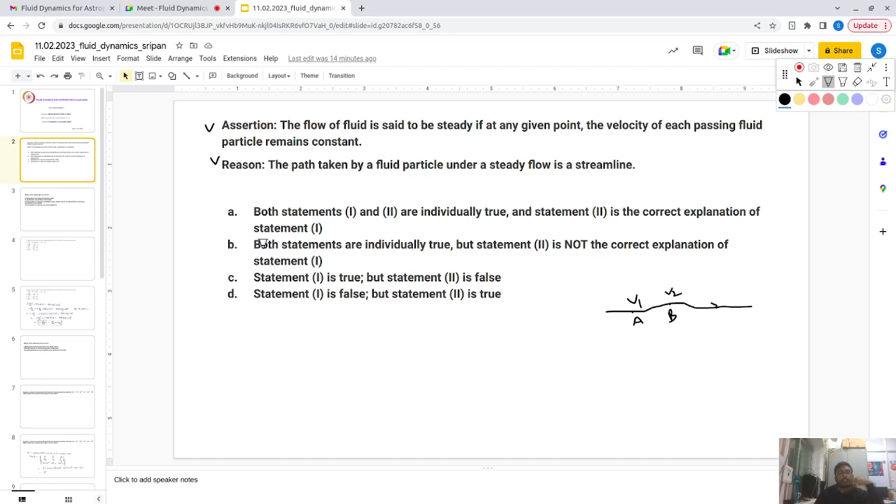So both the assertion and the reason are individually correct, but whether the second one is the reason for this assertion, that is not correct, right? Because this is most likely the phenomena, and this is just a terminology related to that part. So this is not a reason, right?

Both statements are individually true, but statement 2 is not the correct explanation of statement 1. We have this property of a steady flow, and we also call that type of trajectory followed by the fluid particles a streamline. But this streamline terminology is not the reason of this assertion. I think you guys got it, so option B is correct for this answer.

One question, sir - a flow is steady in the sense that if you have the velocity field given to you, and you differentiate it partially with respect to time and that derivative is zero, then the flow is steady, is that true? Yeah. And if there is a time dependence, then the flow is definitely unsteady, is that also true? Yeah, it should not be steady flow at all. Okay, fine, thanks.

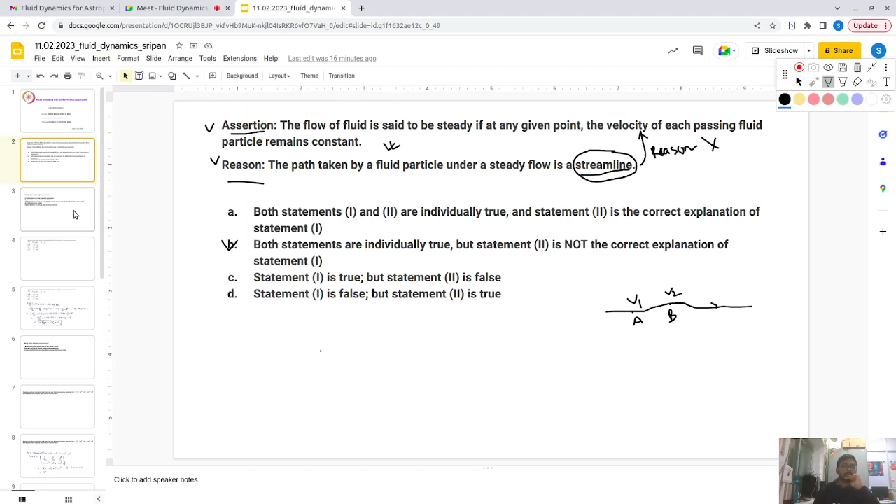So the next question is: which of the following are correct? Streamlines can intersect with each other. Streamlines are parallel to each other. Fluctuations in density is negligible when length scale of considered flow is less than gravitational scale height. Fluctuations in density cannot be neglected.

Can anyone help me answer this question? According to you, which of the following are correct? I think it's 1 and 4 that is correct. So okay, I think it's 1 and 3. So you guys are saying that streamlines can intersect with each other? Yes. Okay.

So in steady flow, what happens is at each point there is a particular velocity, right? And that velocity does not change with time, so it has a constant direction as well as magnitude. Now let's say these are two streamlines. You guys are saying that I have this streamline, I have that streamline, and they are intersecting with each other.

So one is not okay, second and third is correct. Let's say there is a point where streamlines are intersecting. Now what is the direction of velocity along the streamline? It is the tangent at each point, so if it is this, the velocity will be like this. At this intersection point, there will be two tangents, one here and one there. So at some point there would be two directions of velocity, and that is not possible for a streamlined flow.

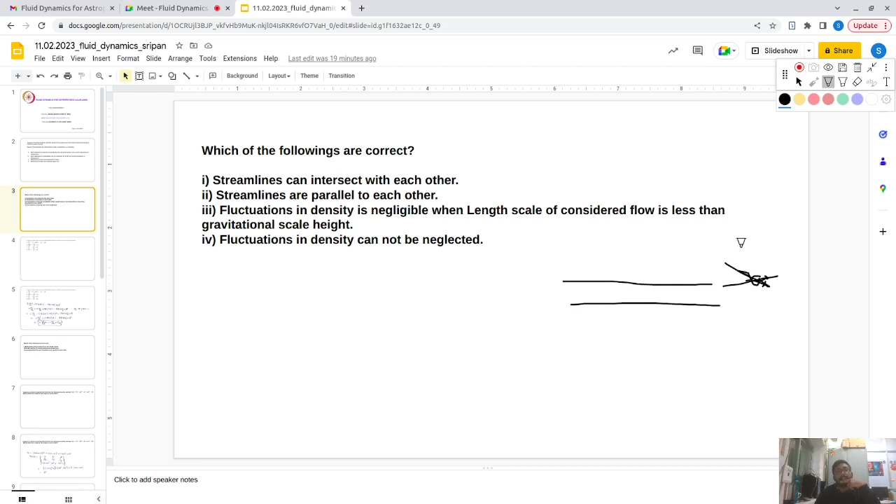It is possible if it is turbulent, but streamlines are connected to steady flows, and you cannot see that kind of turbulence in a steady flow. It goes like a steady streamline, so you cannot have two different directions of velocity at a particular location. So streamlines cannot intersect with each other. What else option do we have? Streamlines are parallel to each other. Obviously, if they are not intersecting at any point, then they should be parallel to each other. So this should be the correct answer.

Now we are left with 3 and 4. Fluctuations in density cannot be neglected. At first you might think okay, it might be correct, but by fluctuation I am saying spatial fluctuation, not temporal fluctuation, because if you have the compressible or incompressible criteria, then del rho del t is 0. I am not talking about that. I am talking about whether the density within the flow is homogeneous or non-homogeneous.

That is the point. Now do you know about the Boussinesq condition or approximation? It tells that the rho g terms are never neglected in any flow — that is the essence of Boussinesq approximation. But it also has another consequence: if the gravitational scale height is higher than the length scale of the considered flow, then you can neglect that fluctuation also.

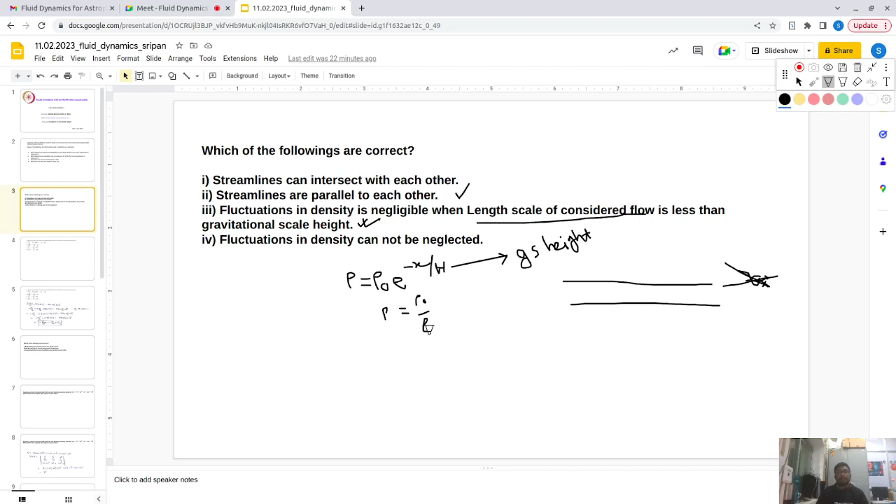Now if the length scale of the considered flow is less than this, then you can think that the fluctuation in density is negligible. But if you have a length scale x which is greater than h, what does it mean? It is already changed by 1 by e times, and if you go further, it will change much more than rho naught by e. So your density cannot be constant throughout the volume if you have a length scale greater than the gravitational scale height.

But if x is less than h, that means you have a very small length scale, then you can say we cannot measure the fluctuation in density. So I think this is also part of Boussinesq's condition. What you said about rho g is obviously correct, but you have two things here. First is the grad p term, the change in pressure gradient. This has to be zero if you are considering a steady flow, for example. From there you can find a similar equation for pressure, that after some height or length scale, pressure will fall down, but till then you cannot neglect the fluctuation in density itself or pressure itself. So I think it's clear.

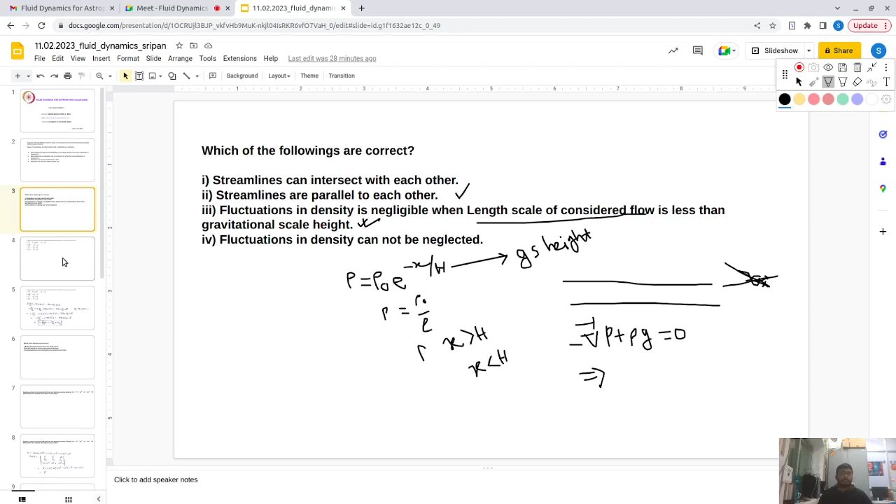So whenever you can define a proper function as a velocity field, then I think we should be able to do this. Okay, I will think about it. Thanks. Fine, so for the time being, let's move on to the next question.

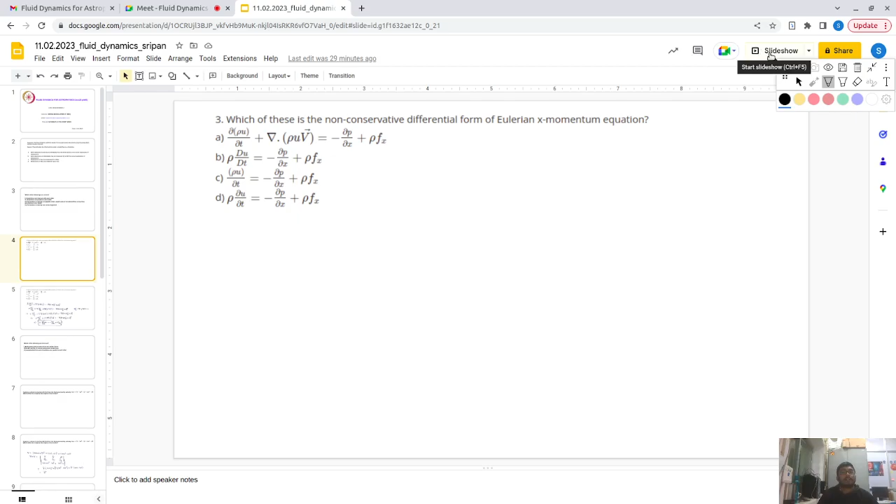What does it mean by x-momentum? It's the x component of the momentum. So first of all, we need to remember what is the Euler equation, what is the form of it. And another thing is what is non-conservative or what is conservative form. So can anyone tell me what is conservative, what is non-conservative form?

The conservative form is you take the quantity, take a time derivative, and you sum that up with the gradient of the flux, and that should equate to zero. That is the general form of a conservative equation.

So basically, when we have the mass continuity equation, what we have is del rho del t plus divergence of rho v, where rho v is the mass flux. So this is a conservative form. Now similarly, for the momentum equation, you can have del t of rho v, the change in the momentum density, plus gradient of the flux will be of the momentum.

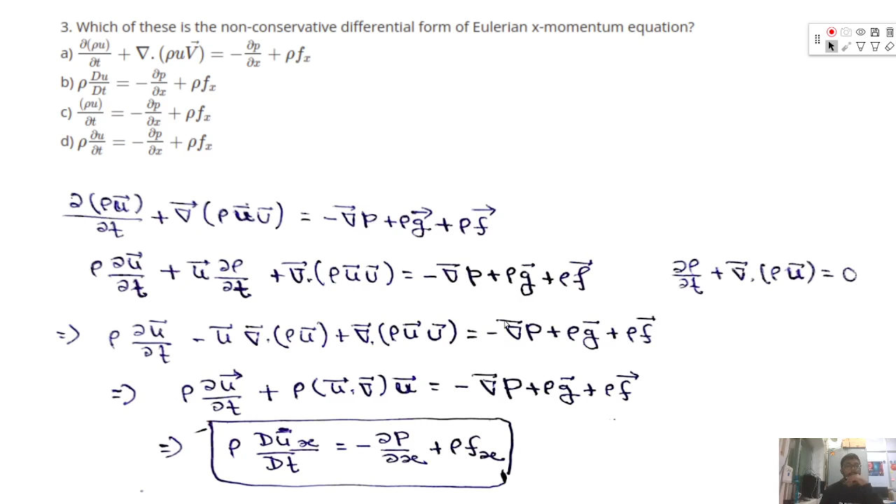So let's move on to the next question. This is a similar thing, the calculation has been done here. Now the next question is: which of the following are incorrect? The first option is both gravity and pressure force are surface forces. Stream function is conserved around streamlines, and equipotential lines and streamlines are parallel to each other.

So tell me what are the incorrect options. 1 and 3 are incorrect. What is incorrect about one? Gravity force is not a surface force; it's a bulk force. And for three, they should be perpendicular, not parallel.

So can you tell me what is a stream function? What about the equipotential line, and how can you tell that they are perpendicular to each other? There was this equation: del phi dot del, the gradient of phi dotted with the gradient of the stream function, equal to 0.

So you have two equations, right? Let's say we start with an incompressible solution, where divergence of u is 0. This happens only if the velocity is defined as the curl of some function, let's say psi, times some unit vector j. This psi is known as the stream function.

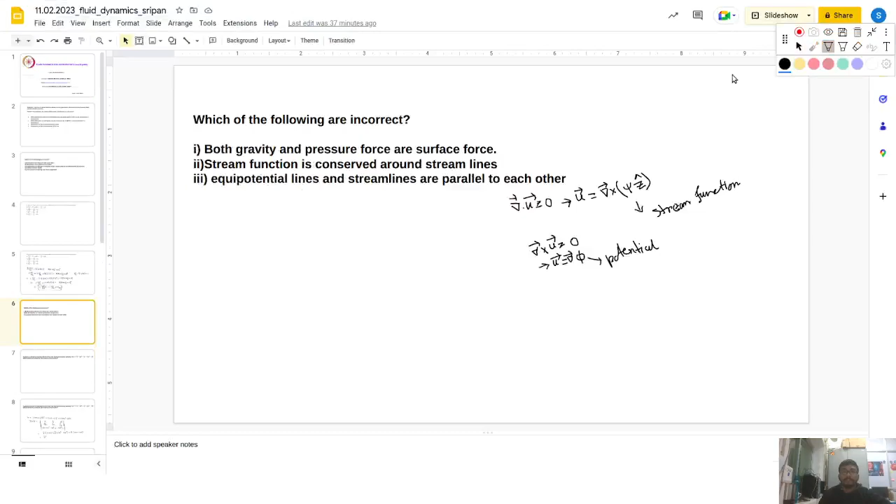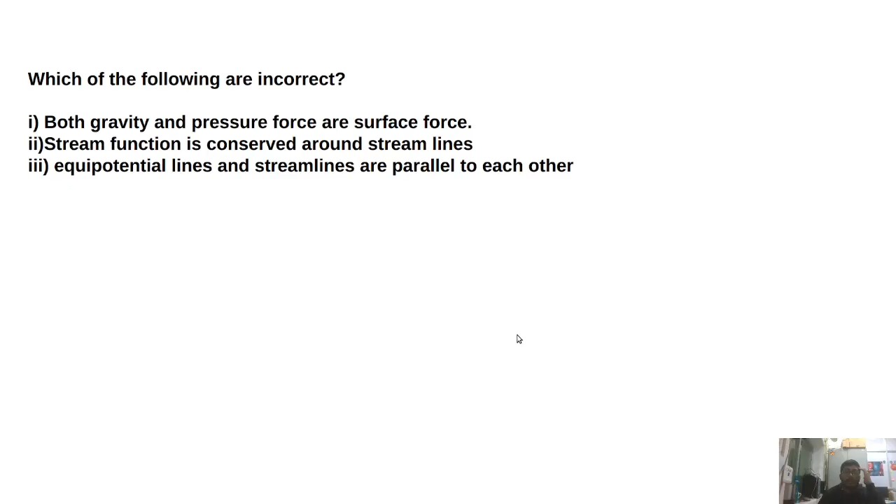So this is the potential. Now you see you have a potential from where you are deriving the velocity. So the grad phi will have a direction which will be in the same direction as u, right? Grad phi is parallel to u.

And from this you find that grad of psi z—now psi is directing in some direction followed by some z, it might be some arbitrary direction, but when you take a curl of that, that means psi z itself is perpendicular to u. Now from these two equations we can see that there are some equipotential lines given by phi, and some stream function along the streamlines. Both will have a perpendicular relation between them, okay?

And the other thing is the stream function is conserved around the streamline, that is also correct, but this should not be a correct answer as gravity is a body force, okay? Fine.

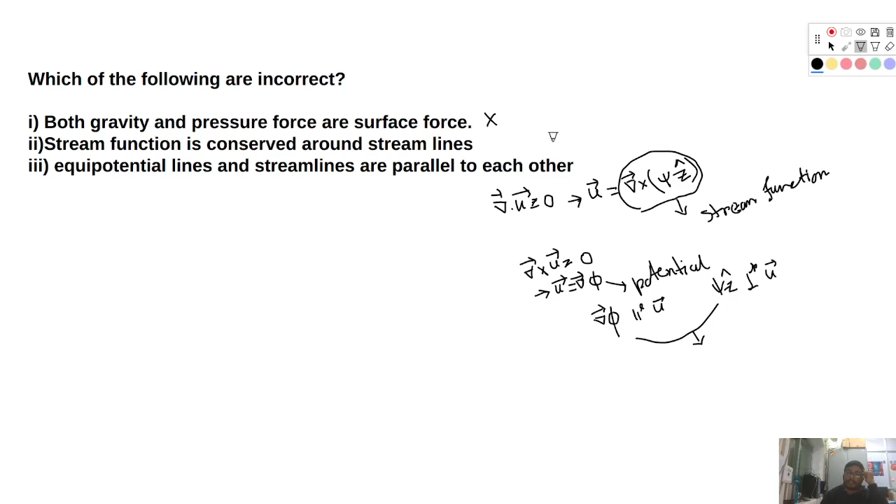Someone is writing something in the chat box. Okay, Sachin, fine.

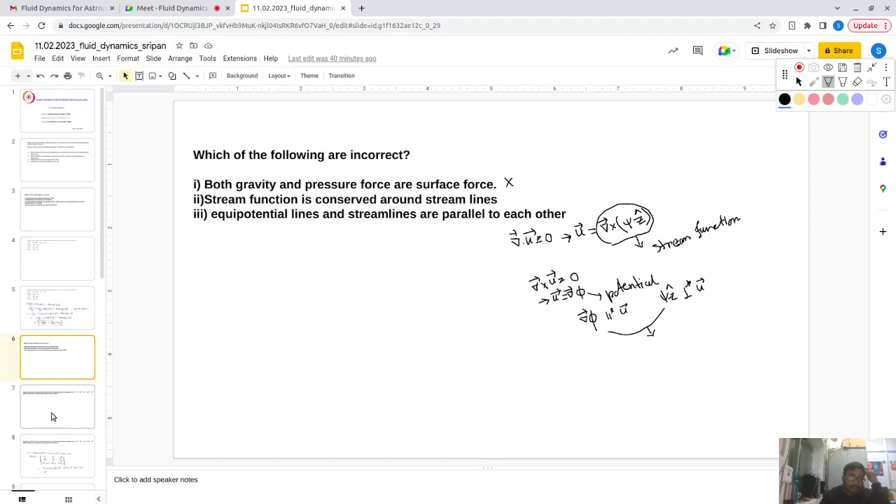Now let's move on to the next question. Suppose a wheel is moving with the flow of a fluid governed by some given velocity field. What will be the complete description of its motion? So you have some flow, some velocity field, and a wheel moving with that flow. Is this motion only translational, or can there be any extra kind of motion associated with this wheel?

So what extra motions can be there? First of all, we need to find out what other options there can be for this wheel besides translational motion. Can anyone tell? Rotation will be one possibility.

Rotation depends upon which property of the fluid? It will depend on the viscosity of the fluid. Now, viscosity depends on the velocity gradient, right? Yes. And another thing is, if it is inviscid, it has to be irrotational also, right?

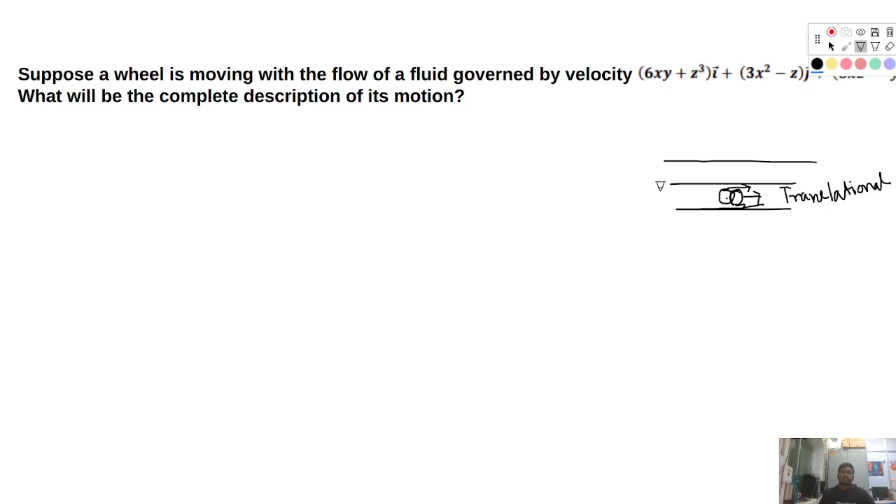Now given a velocity field, what is our point? How can we determine whether there is some rotation or not? Because we don't have any information about viscosity given in the question, we only have a velocity field. So how should we determine whether there is rotation associated with this motion or not?

Can anyone tell me? We need to find the curl of the velocity field. So can you guys solve it yourselves and tell me whether there will be any rotation or not? What you basically have to do is take u as a function of x, y and z, and from there find the curl of u. If it equals zero, then it will be only translation.

And if it is not equal to zero, then you have translation plus some rotation. So kindly solve it yourselves and tell me the complete description. Okay, I found curl is 0, so it should be no rotation, right? Only the translation. Yes, yes.

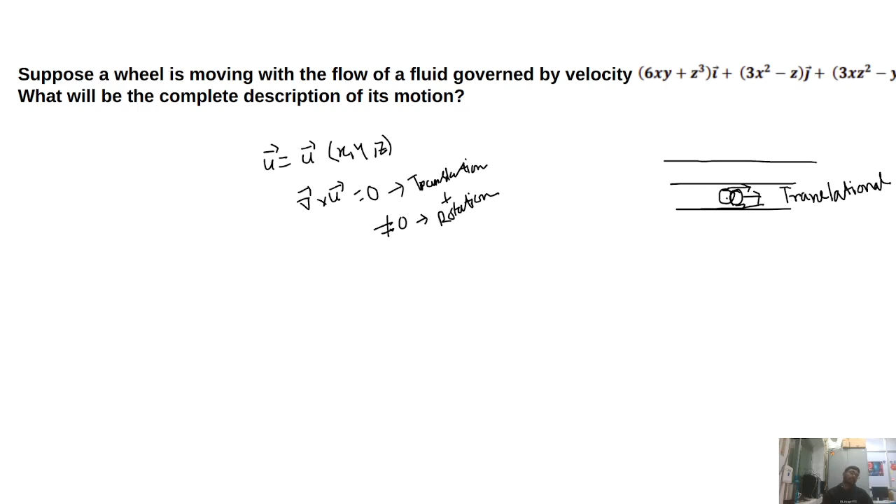Another thing, as I already mentioned, is that if you have irrotational flow, that means there is no velocity gradient also, right? And that means the fluid is not viscous, it is an inviscid fluid. Okay, let's move on to the next question. This is just the solution.

Now, the Navier-Stokes equation describes the motion of: solid substance, non-viscous fluid, viscous fluid, or gas. What is the correct option here? Viscous fluid. Okay, now what is the difference between the Navier-Stokes equation and the Euler equation?

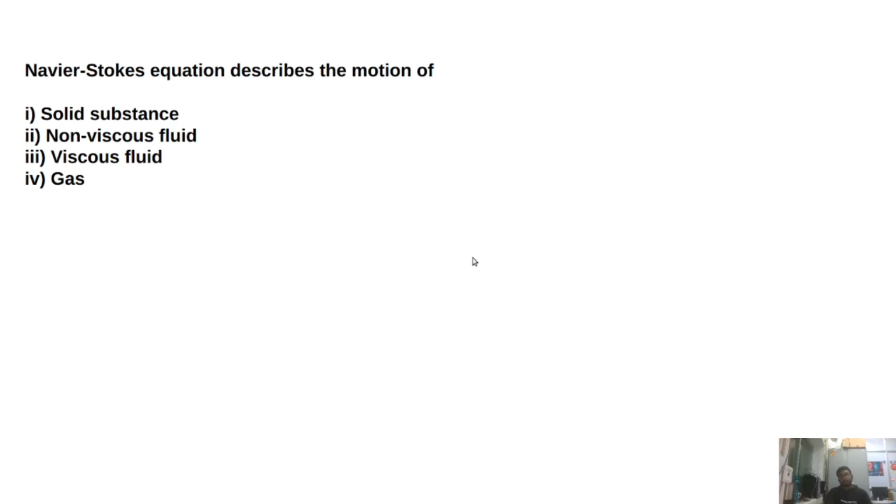We do not consider viscosity when we derive the Euler equation. The Navier-Stokes equation is a more general form, and if you neglect or do not consider the viscous term or drag, then that becomes the Euler equation, right? Okay, so fine, this should be the viscous fluid.

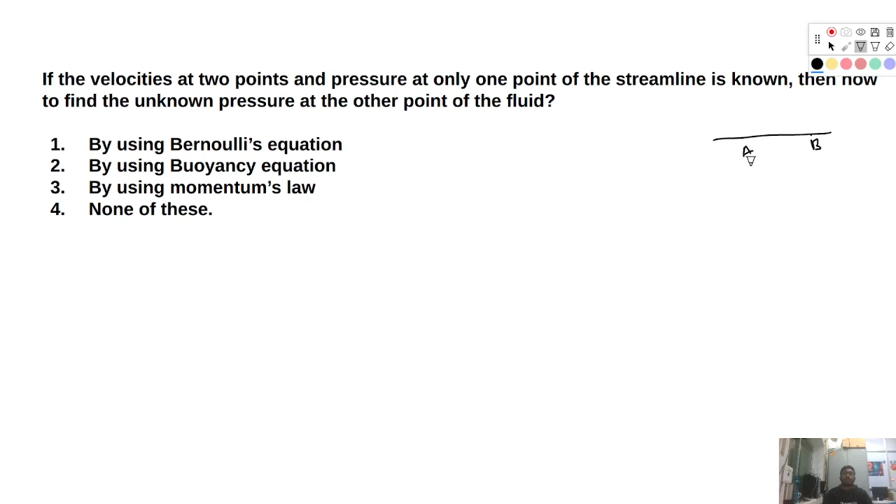Now the next question: if the velocity is known at 2 points, and pressure is known at only one point of the streamline, so you have a streamline with 2 points, let's say A and B. If you know velocity VA and velocity VB, and you only know the pressure at PA, then how do you find the unknown pressure at the other point, PB? Tell me what is the correct option for this.

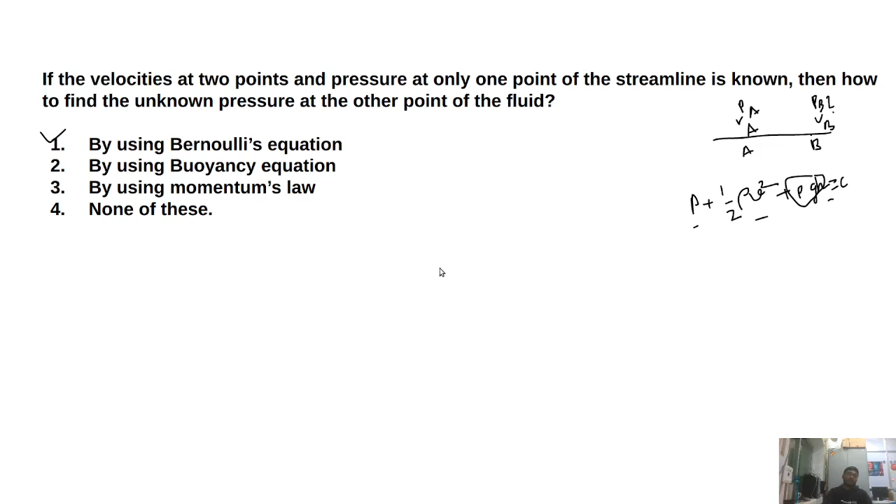The next question is about how Bernoulli's equation is derived, based on the following assumptions: there is no loss of energy in a liquid flow and flow is steady; the flow is rotational; except for gravity and pressure forces; no external force acts on liquid flow; the flow is viscous and incompressible.

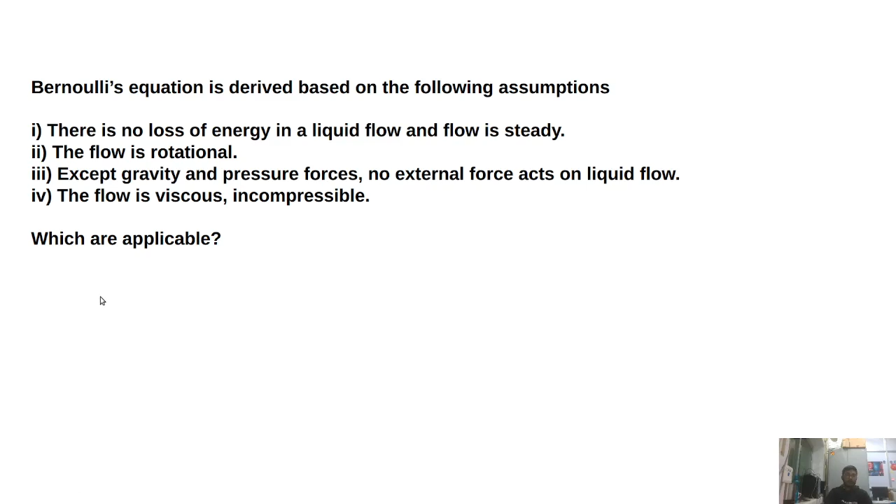So which of these assumptions are applicable? Tell me. A student says: I think there is no loss of energy in the liquid flow, the flow is steady, and except for gravity and pressure force, no external force acts on the liquid flow. What about the other students, is this correct? Another student says first and third. Sachin agrees. Yes, that's correct - the first one and the third one.

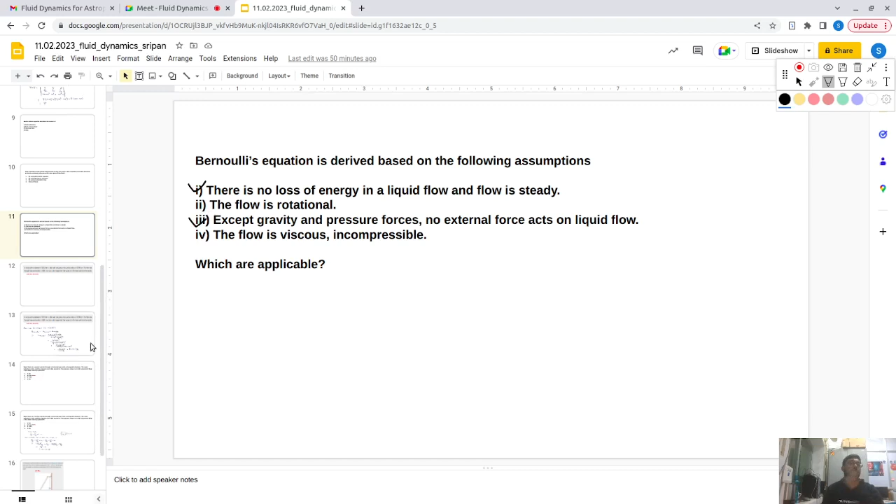Now the next question is a numerical problem you have to calculate. Just give it a try. You have a nozzle with a diameter of 0.5 centimeter, which is attached to a garden hose with a radius of 0.9 centimeter. You have a diameter and a radius, and you have to find the flow rate through the hose and nozzle, which is 0.5 liter per second, given that the flow rate is constant throughout the flow. Calculate the speed of the water in the hose as well as in the nozzle.

Now, without calculating the answer, if we just ask what will be the difference between the speed of the water in the hose and the nozzle - whether the speed of the water is high in the hose and low in the nozzle, or vice versa - how can we tell that? Can anyone tell me? You have a constant flow rate, and two different radii given. How do you find the speed of the water given that the flow rate is constant in different diameters?

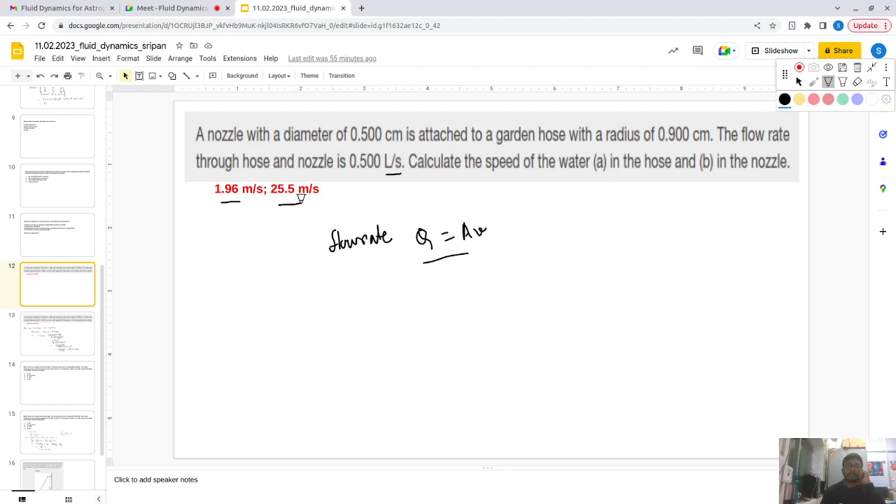Now as someone suggested, if A is higher, V should be lower because the flow rate is constant. Using this formula, you can easily calculate the velocity at two different points, in the hose and the nozzle. The catch is you have to find the cross-sectional area. Since both the nozzle and the hose are cylindrical in shape, you can find the cross-sectional area as pi r square, where r is the radius. Now can you calculate this by yourself and tell me whether these answers are correct?

Is someone trying there? Just give some assurance that you guys are trying.

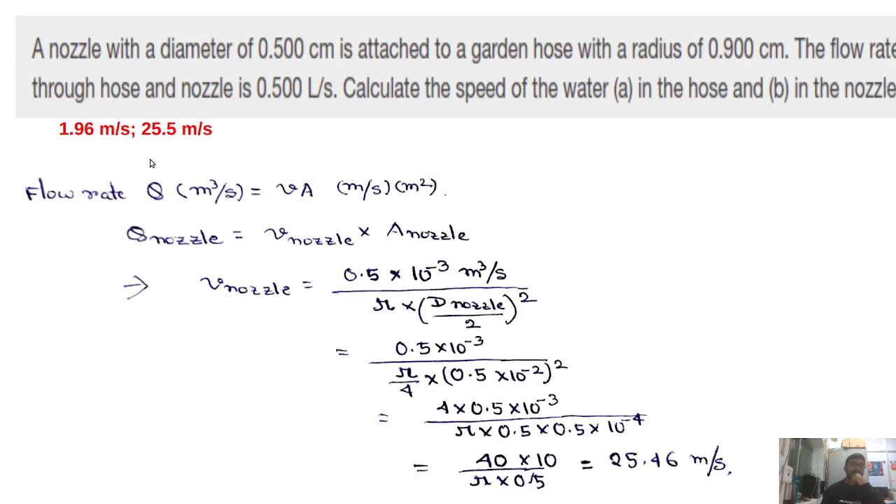I think it's clear, this is a pretty straightforward problem. Any problem? Hello. None from my side, sir. Okay fine, let's move on to the next question.

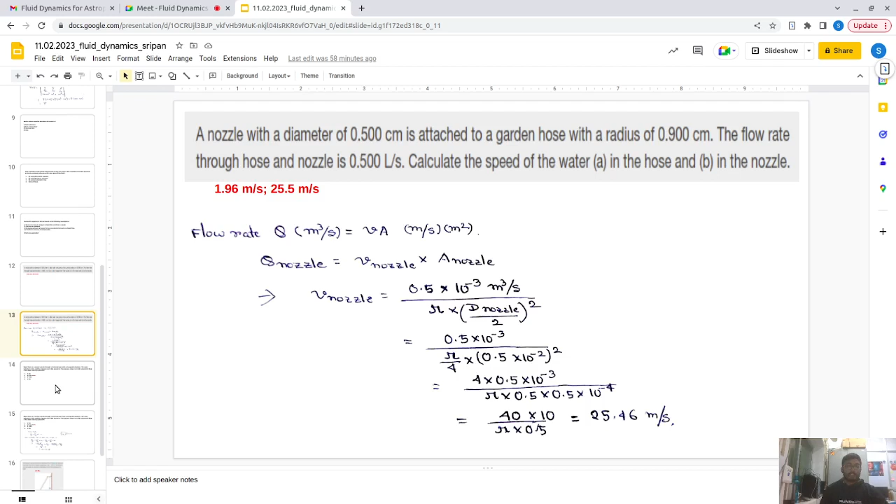So are you guys trying? Yeah, just one minute. Okay, have a try. Writing something. Okay fine, we try.

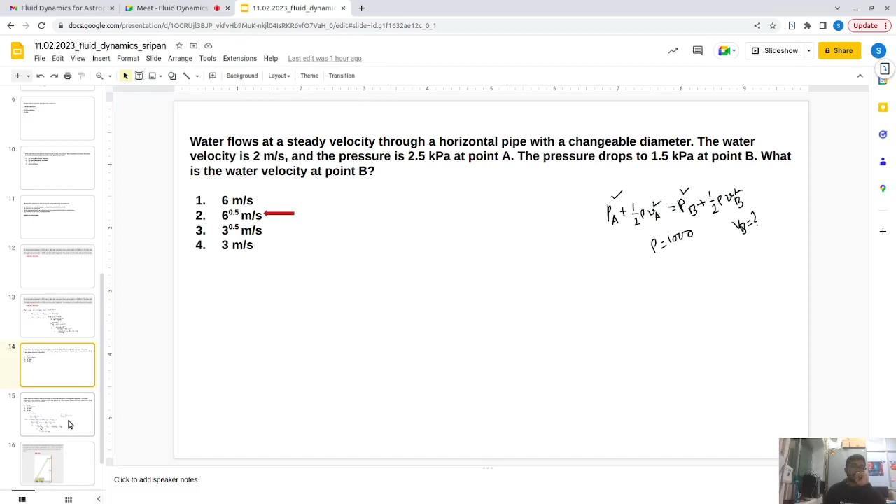Okay, let's have a look at the solution, even though everyone already solved it. First thing is that you have this Bernoulli equation, which tells that the energy should be conserved. So you have this given, and Z at A and Z at B are the same because it is a horizontal pipe. You just have to put the values in this, and you will get that VB is root 6 meter per second.

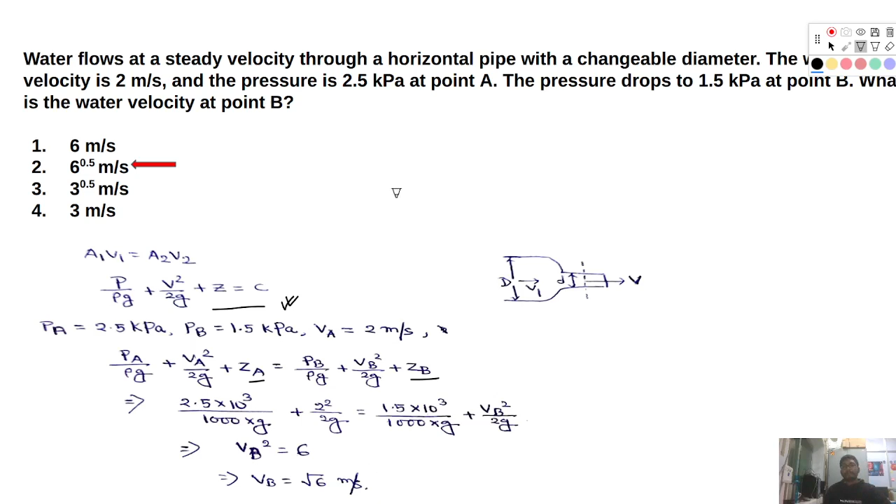Okay, I think this is the final question. You have a fire hose used in major structural fires with an inside diameter of 6.4 centimeter. This is the figure, it has been used to extinguish fires in high buildings, let's say. Suppose such a hose carries a flow of 40 liter per second, starting at a gauge pressure of 1.62 into 10 to the power 6 Newton per meter square. The hose rises up 10 meter along a ladder to a nozzle having an inside diameter of 3 centimeter. What is the pressure in the nozzle?

Okay, so first of all, one term here is gauge pressure. Can anyone tell me what is gauge pressure?

You know about pressure, but what is gauge pressure? How does it differ from normal pressure? Anyone know?

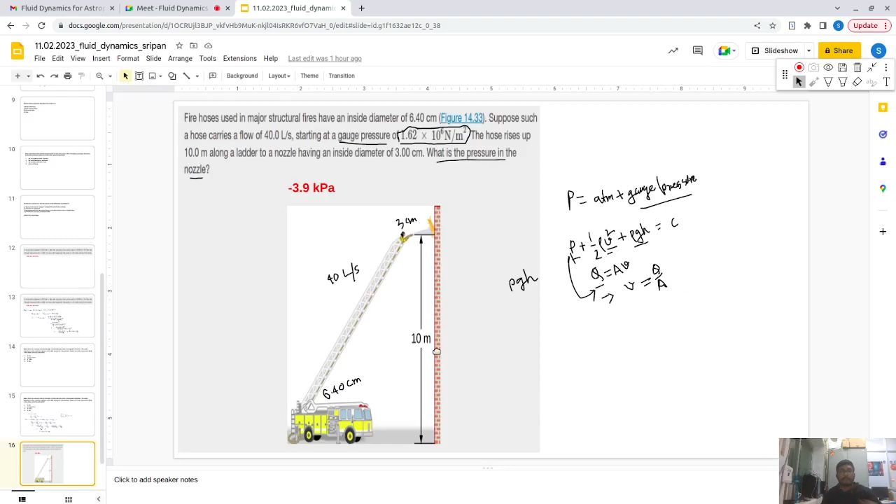Sachin, any update? Sumit is not doing it. Anup, Aditya, anyone?

So I'm getting some 5 or something. 5,000. No wait, one second. It's not that, one second. Okay. Sir, please make the question visible.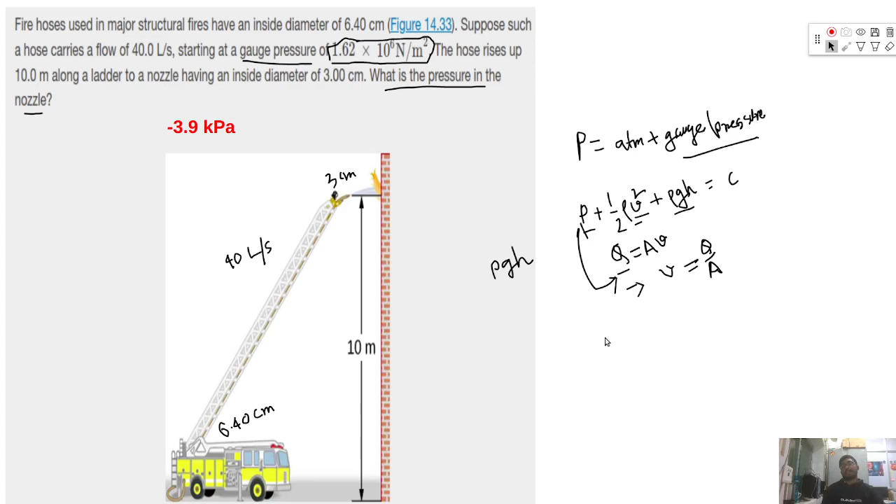Have you put the diameters properly in meter? Yeah, I did that. Okay, let's have a look, maybe I can be also wrong, I don't know. So the velocities are okay, right? The velocities are already found, that's fine, velocity is okay.

Yeah, I got my mistake, I forgot the 10 to the minus 3. So basically we started with the flow rate, and using the given value of the diameters at different points, I found VA and VB. As someone suggested, these are the values: VA is 12.43 and VB is 56.59, because to have a constant rate, you should have greater velocity when the diameter is smaller.

After that, I took the lower point which I termed as A, and the higher point is termed as B.

So using the Bernoulli theorem, I put all the values which the question is suggesting, and also the velocity values which I estimated through the conservation of flow rate. So all the values have been put in, and using them I found PB to be minus 3961.6 Newton per meter square. So I'll call it minus 3.9 kilopascal.

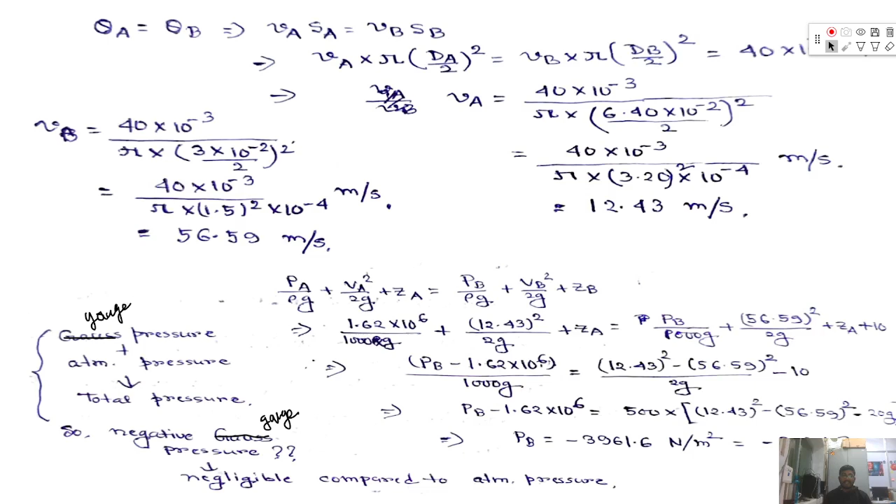What about others? Sachin, Riti, anyone taken minus 4? Okay, yeah, I was also getting something like that, minus 3.9. Okay, fine. At least someone confirmed.

So, what about others? Pintu, are you trying? Yes sir, okay, just want to try and confirm.

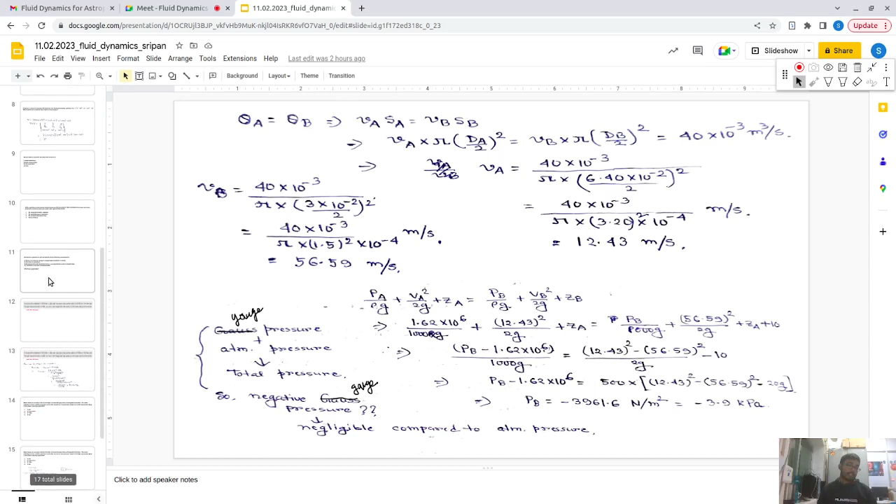So, any comments, any improvement needed, anything? If not, I think let's end today's class, because I don't have any content left for today. So shall we leave?